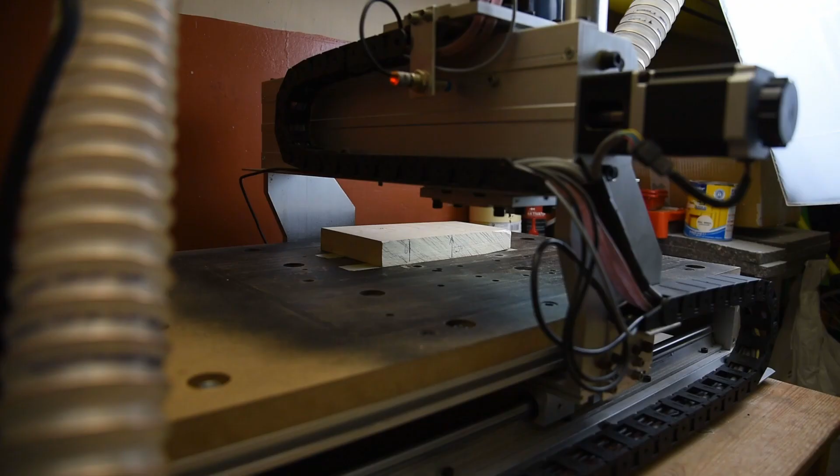Hi, my name is Yury, and in this video I'd like to share my experience of making wooden toys, how to turn a drawing into the real object. The basic idea is to use a CNC router to cut out the parts using double-sided machining, then finish and, if necessary, assemble parts manually.

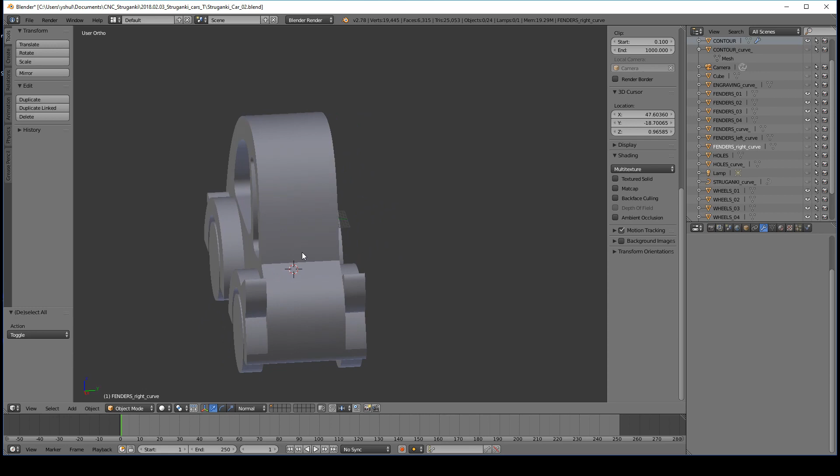Usually the design starts from the idea. In this video I'm going to use the image of a car which was created by my sister. Looking at the image, it is nice to visualize how the toy should look. What will be the components of the toy? Will it be a single piece or multiple pieces? What type of wood will be used?

These questions are important to answer in the very beginning, as you can trace the picture more precisely and create the vectors you really need. In the case of this car, we decided to make a more 3D-looking model with standing-out fenders. So there will be the following components: car body, fenders, wheels and axles.

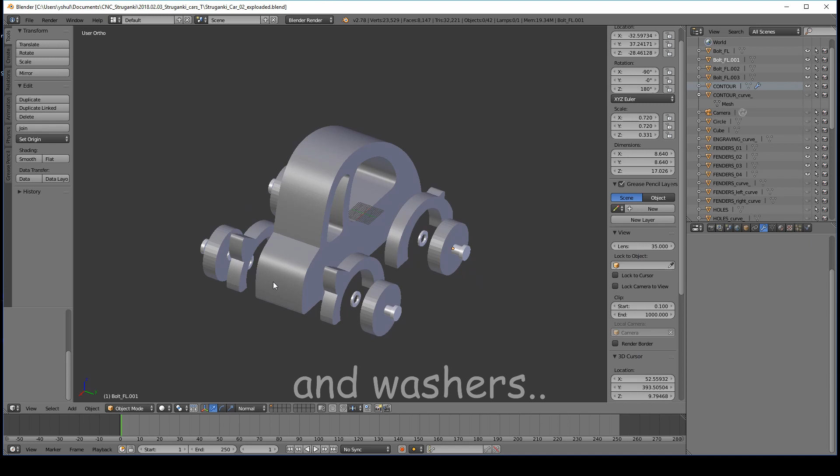Next, what I usually do, I transfer a sketch into vector form and use those vectors for toolpath generation. To do that, I drag the image into Inkscape and, using the Bezier tool in Spiro mode, I trace the contour of the drawing and create vectors of the parts I need.

I prefer to use layers. I usually keep my image on the first layer and create vectors on the layer above. In this case, I can reduce the opacity of the image and see the trace more clearly. Also, at this step, I can easily correct the design and add some extra features if necessary.

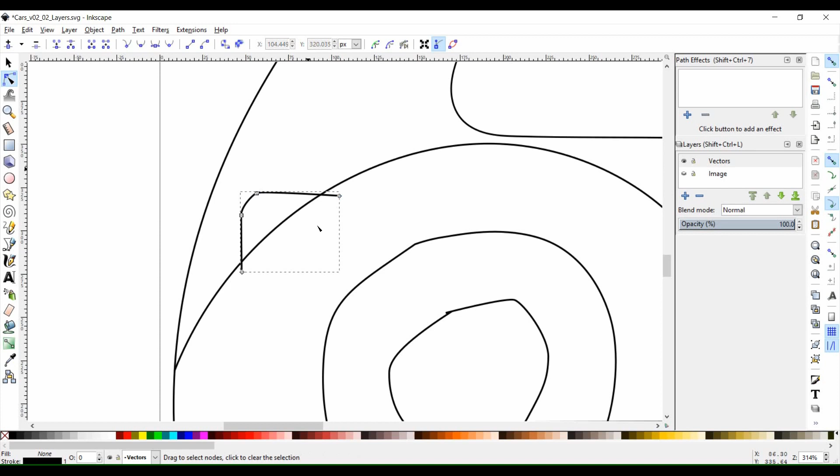For example, this little window is a bit too small, and if I'd like to machine it, it is going to be too thin here. So what I'm going to do is shift both vectors a little bit to the left, making this window a bit larger. Also, I think it's a good idea to add a stoplight here, so that the car would look more realistic.

In order to draw the inner parts of the fenders, I'll use the contour of the wheels. The wheels themselves I'm going to construct in Cut 2D directly, where it is much easier to do. Alright, the vectors look good to me, and I think it's time to import them into Cut 2D and finish the design there.

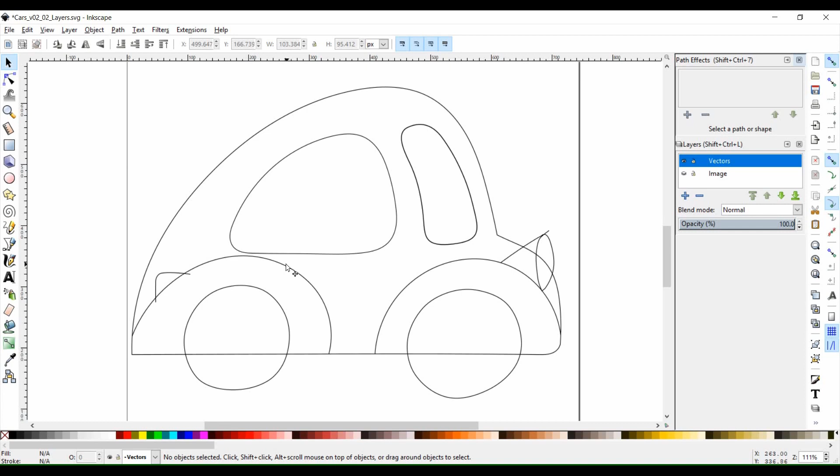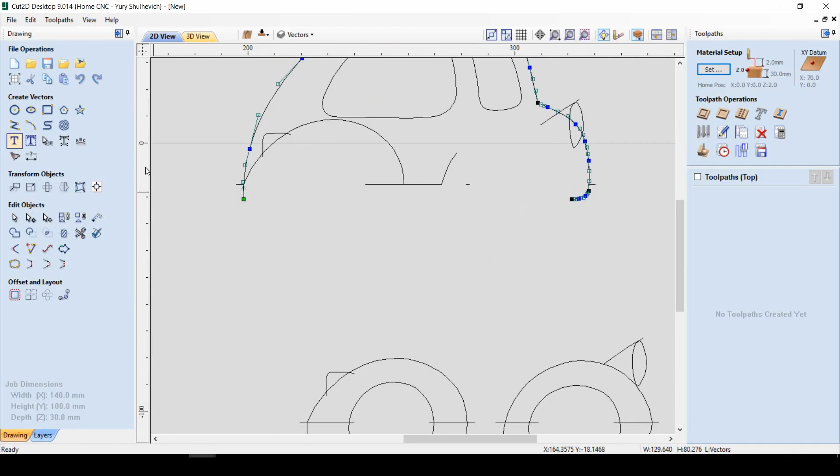In Cut 2D, I split vectors into various components, which can be copied later into separate files. It will allow me to create specific toolpaths taking into account different stock thicknesses. So, I make another copy and separate the fenders. Then I join the car body vectors and turn them into one continuous line that the tool can fluently follow at the time of machining.

At sharp corners, tools do not follow the actual toolpath, and depending on the tool diameter, there is always a bit of material left. In order for the engraving to look nice in cases like this, it is useful to prolong the engraving toolpath a little bit to ensure the desired component is separated.

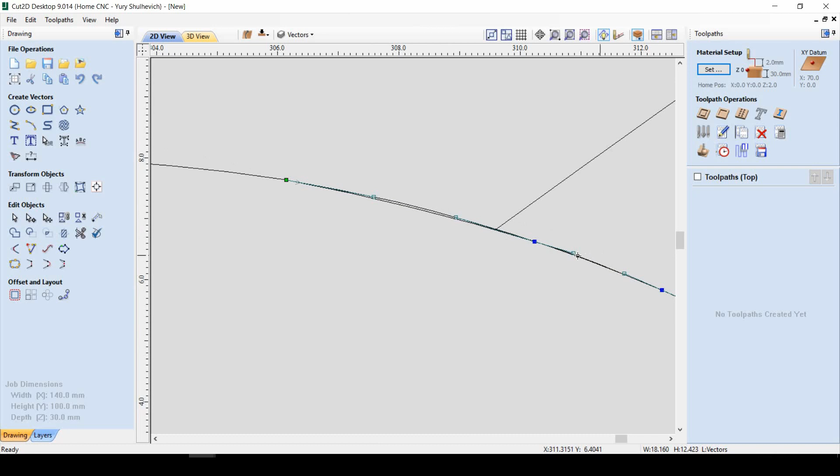I usually split my design into different layers, so that I can select various parts and elements very easily later. It is especially useful if you have a complex design with multiple overlapping toolpaths. Let's add wheels to the design. As you can see, the fenders need to be corrected in order to follow the shape of the wheel.

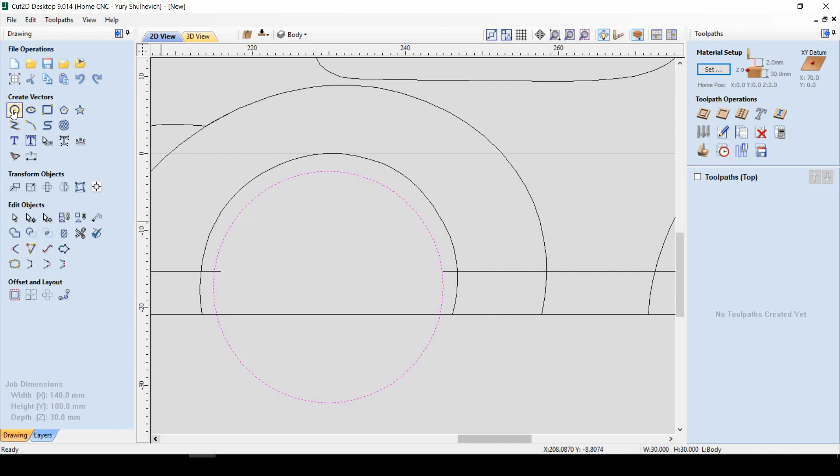I create a rear wheel and then copy it to the front. Using the circular vector creation tool, I add several circles which represent the wheel, the rim, and the fixation hole. Next, I copy the rim to the car body layer and join the vectors, making the reinforcement where the holes are located. Also, I create a new layer and move the windows there.

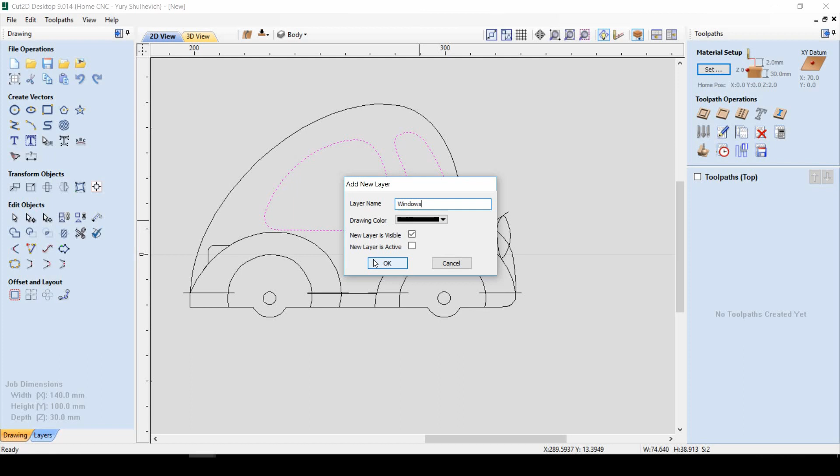Front fender needs some final adjustments and the design is complete. So, when the design is finished, it's time to select materials for the project. In case of this car, we decided to use maple for the car body, mahogany for fenders, oak for wheels, and ash for axles. Also, I like to add little washers made of 1.5 mm plywood between wheels and the car body, so that they create a little gap, which makes a car model look more realistic.

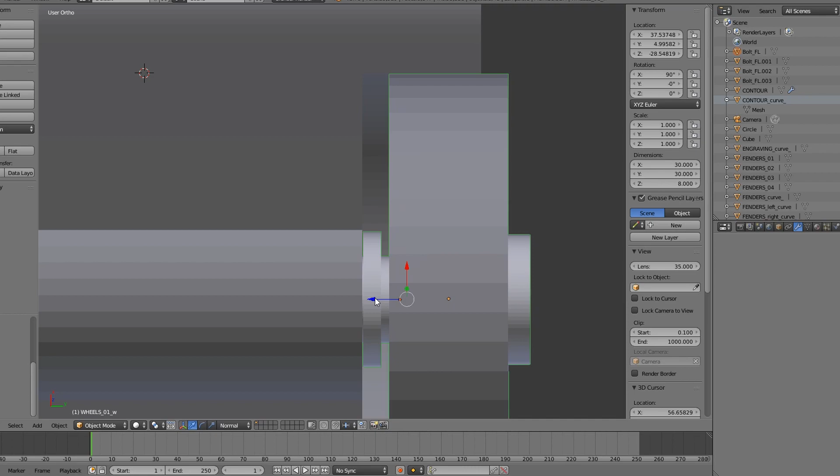Now it's time to set the thicknesses of the parts. I have some wooden stock, so I choose the blanks based on what I have. It is going to be 30 mm for car body, 8 mm for fenders and wheels, and 20 mm for axles. And here the tricky part begins.

In order to make axles strong, the wood fibers should be aligned along the axle. To prepare the wood accordingly, I take a thick block of ash and cut the blank 90 degrees to grain, so that the fibers are going vertically along the axis during the machining. Also, I have very good experience of making wooden pins, axles and balls out of ash. This type of wood is quite strong and can be polished to a very nice silky finish. It helps to reduce friction and allow wheels to turn with lower resistance.

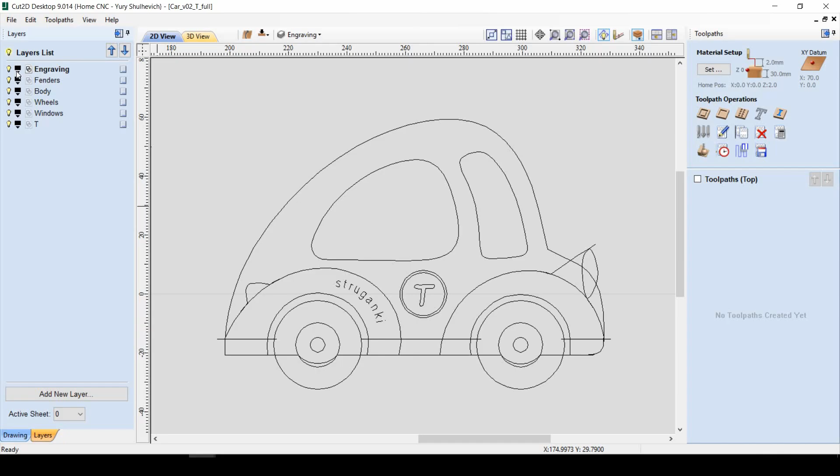Next step is to split design into different files according to materials used. It means that for this car I'm going to make car body, fenders, wheels, axles and washers in different files. The reason for that is the stock thickness, which is different for all those parts.

Now I'd like to explain the method of double-side machining I use in order to avoid supports. The benefit of doing so is a possibility to have the part almost ready and finished right from your CNC. For example, this axle bolt is straight from the machine, no extra finishing was applied. Another example is an extra smooth finish of a cut surface, which is very important if it is visible side of your project, like contour of the car body. There are no visible marks of tooling and there is no need to remove supports and sand the whole contour manually.

My method is based on the method of stock fixation that I found in one of the videos from Crimson Guitars. Link for that video is in the description.

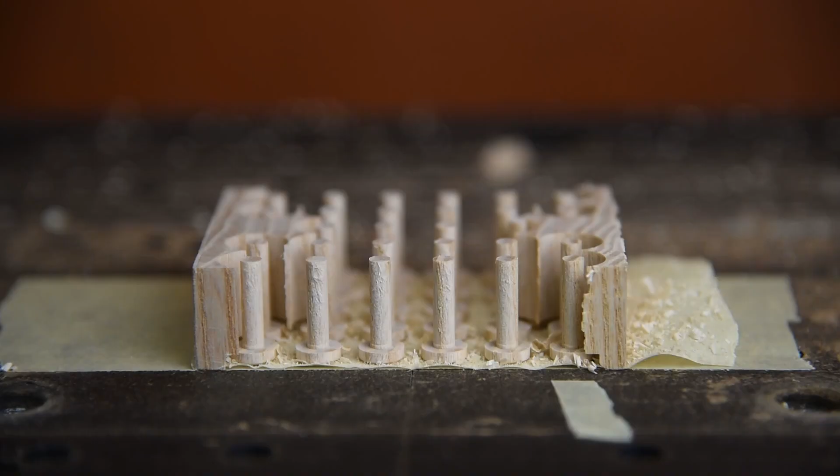So, the idea is to use a masking tape and super glue. After applying tape on the table and your stock, you glue them together using super glue. Also, activator or simply water helps a lot to speed up the fixation. In this case, we get a very strong fixation in X and Y axis with possibility to pull the part in Z axis and detach it after the machining is done. Using this idea, I could cut out those tiny axles without any supports, only masking tape and super glue.

Of course, to flip your stock over, you need to add dowels as markers to make sure that the bottom side will be aligned with the top side perfectly. Okay, here's an example of how to make toolpaths for a car body using masking tape method. So, after the stock is fixed, first CNC job I prefer to run is engraving. I tend to use two paths with different feed rates, which makes path very clean.

As I fill them later with paint, it is important that the sides and edges of the engraved paths are smooth and free from any residual chips. It will ensure that paint stays inside the path without penetrating much to the sides or along the wood fibers. More details on this later.

Next CNC job is roughing path of a contour and windows. While machining the windows, it is nice to remove material completely to prevent any breakage after the part is flipped over. It is critical for pockets which can have very tiny middle part left after the machining, so I prefer to use pocket tooling here. Also, I set the depth of cut not all the way through, but leave around 1 mm, which makes it possible to flip over all the components together.

After roughing path is done, I do finishing path with the same tool, but with increased RPM and reduced feed rate, for the whole depth in one go. It removes the lines left on the part from the roughing path and makes it 0.2 mm smaller, which helps to cover the flip over misalignment. Last path is going to be my round over bit.

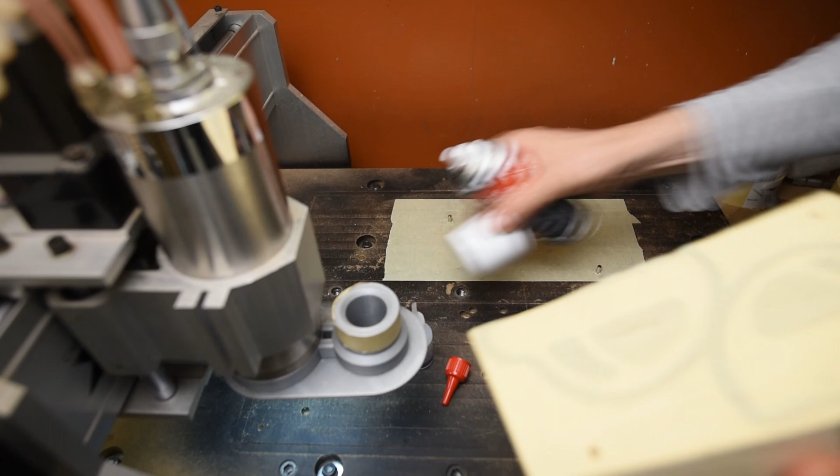Here I use the one with 4 mm radius flutes. After the stock is flipped and aligned, I run engraving toolpaths for the other side. In general, I prefer to run all the needed CNC jobs before separating the parts. It ensures that each part is fixed while it is machined, as some of them can be very small and easily be detached due to impact of the tool.

As a finish path, I run the round over job again, which separates the parts and makes the edges round. Here you have it, almost finished car body. The same idea applies to fenders and wheels, with slight variations due to specifics of the parts. However, I'd like to walk you through the machining of the axles, as it is a bit more tricky.

First thing to do is to be sure that the block you work with has flat surfaces, so that all the axles will stick to the tape and to the table as well. I normally use a 20 mm end mill for planing this little stock in order to meet the requirement. Then I start to machine the side with the axle's head and make a cut a little deeper than the axle head desired thickness. Also I finish this side with round over bit.

After the stock is flipped over, it is very easy to cut out the axles, making a cut to the depth which intersects with the previous cut from the other side. It also eliminates imperfections in flip-over alignment. A little trick here is to leave 0.5 to 1 mm before going through. In this case, the impact of the tool will be minimized and the axle will stay in place after separation.